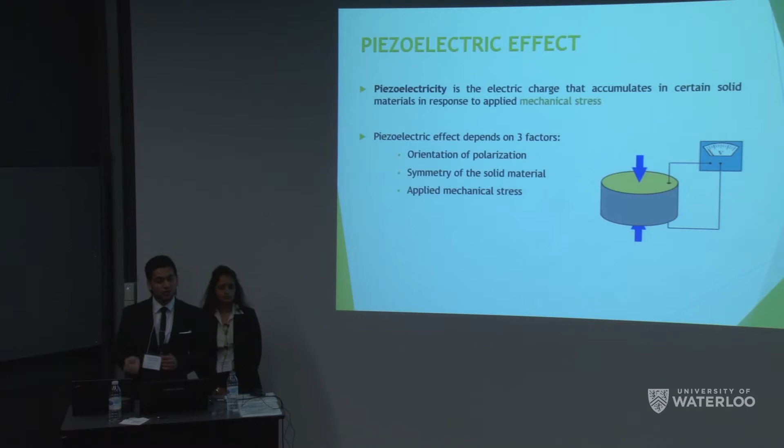Now, in order to harness this energy, we have chosen a technology well known today as piezoelectricity. Without going too much into the technical detail, piezoelectricity is simply the electric charge that accumulates in a certain solid material in response to applied mechanical stress. And for our design project, we have chosen zinc oxide. Why zinc oxide? Because it has one of the highest piezoelectric coefficients. And as engineers, we all like bigger numbers.

So where do we plan on integrating this device? Imagine if you could simply type on your keyboard and your typing would charge your laptop in real time. Imagine if you could charge your phone or iPod from the energy of your heel strikes. The possibilities are endless, and the limit is your own imagination. And now, I'll hand over to Mahika to talk about the specific details of our device and what we have been able to do so far.

Perfect. Thanks, Tad, for the great introduction. And now I would like to talk about some of the design considerations that we made and the journey so far to come up with our final device. So again, being engineers, we did start off with modeling our device. So the plots that you see here are just zinc oxide films, like bulk films.

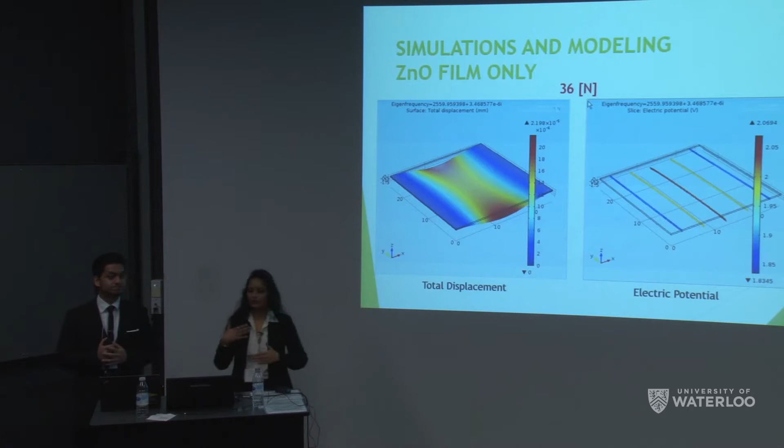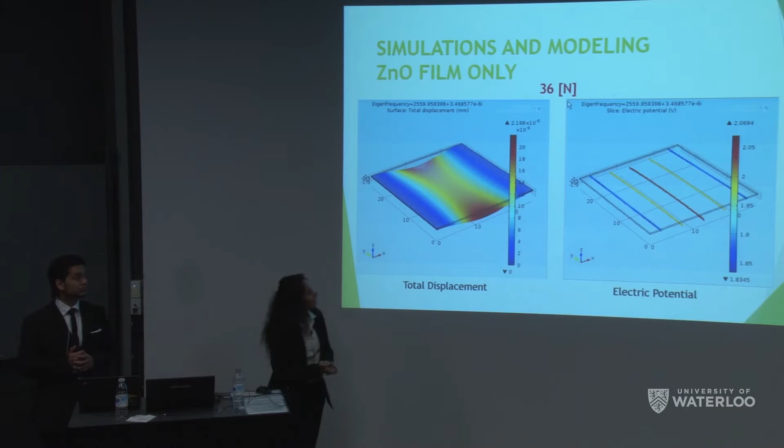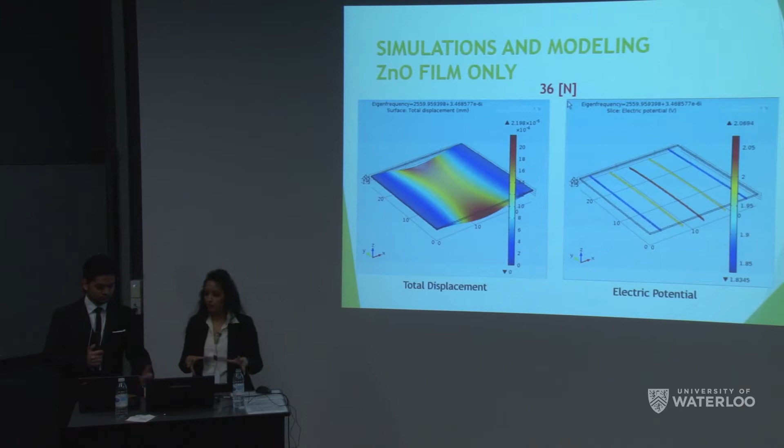And the graph on the left shows how the displacement profile would look for the zinc oxide film when it experiences a force of approximately 36 Newtons, which is what we estimated is the amount of force that an average male's heel strike generates. And then the plot on the right shows what kind of a potential it would generate on the entire zinc oxide film. So we can see from the plot that the simulation tells us that with this kind of structure, we can achieve a little over 2 volts, which is what we started off with as our benchmark.

And then moving on to nanowires, since that is what we wanted to explore more for our device, we tried to simulate how the length of nanowires could affect the resultant output that we would get due to piezoelectricity. So we simulated 2 and 4 micron lengths of nanowires, and we kept the number of wires to 10. And we observed that longer wires would give us a higher output. And again, even in literature review, we've seen people work with piezo zinc oxide nanowires and how they could tune their properties by changing the size.

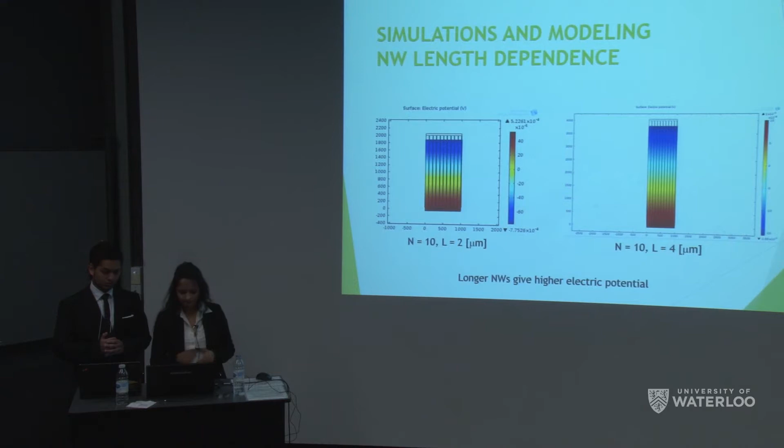So before I get into the nitty-gritty of our design considerations, I would just like to give a brief overview of what our fabrication process is. So we do start with a flexible PEN substrate, which is just a polyester, and it has great barrier properties. The next step is to deposit silicon nitride using sputtering. And the main purpose of this layer is to provide it some sturdiness so that we can get a uniform growth of our wires. But at the same time, we're not really sacrificing the flexibility of this device.

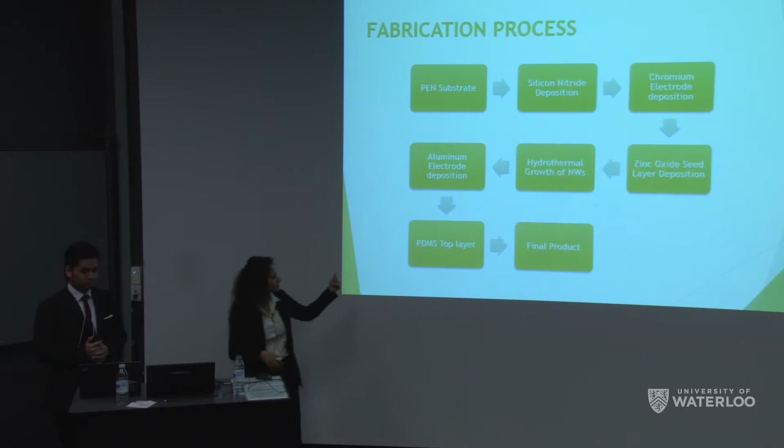The third layer is our bottom chromium electrode, on which the zinc oxide seed layer is deposited, which is key for the growth of our nanowires, for which we use the hydrothermal mechanism to grow the nanowires. And then lastly, we complete the device by using an aluminum-coated PDMS layer as the top insulation, as well as the top electrode. And that is what gives us our final device.

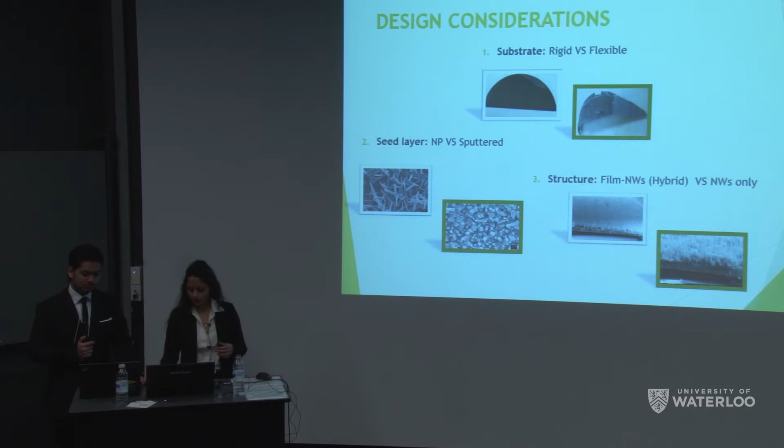So as I'd mentioned, we considered a lot of different factors to reach our final device. And the three main factors that we considered were substrate, which seed layer to use for the growth mechanism, and the final structure, the piezoelectric element of the device. So the substrate, we were debating between whether we wanted to go rigid or flexible. And so we went ahead and we tried on silicon and glass as well as PEN, and we grew some nanowires. So the images here show that in terms of the growth, we got pretty uniform and pretty similar growths on both the substrates.

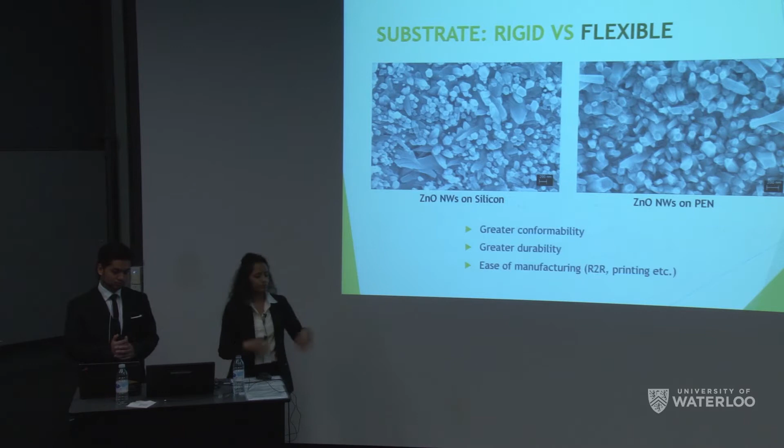And the reason why we went ahead with the flexible one is because it can conform better. It would probably be more durable than something like glass or silicon. And with new manufacturing technologies like R2R and printing coming up, we could possibly see this being easy to manufacture in the future. The next consideration was our seed layer, which is key for the growth of the nanowires because these act as nucleation sites from which the wires crystallize and grow.

So for this method, we had two approaches that we could have used. One was just spin coating some zinc oxide nanoparticles, and the other was actually RF sputtering a thin seed layer of zinc oxide. So again, we tried both to see which one would work better for our device. And as the images show here, the sputtered zinc oxide seed layer gave us much more vertical, uniform and dense growth of wires. And then even the results reflected that. We exposed both the devices to a mechanical stress by tapping on them, and we measured what electrical results we would get. And it was evident that the device made with the nanoparticle zinc oxide gave us much lower results than the sputtered seed layer.

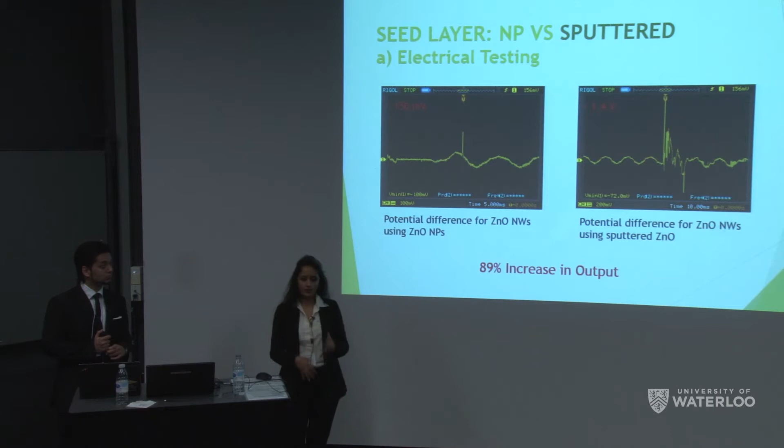And the third factor that we considered was the structure. So we wanted to see whether a hybrid device would give us more output and more durability of the device, or just nanowires. So we considered that as well. We went and we made both. But with testing and with working with the device, we observed that the zinc oxide nanowires only device gave us increased flexibility, durability, and there was almost no difference in the output that we got for both the devices.

So why nanowires only and not the bulk zinc oxide film? Well, we can think of nanowires as basically a disintegrated zinc oxide film, which we propose would provide more flexibility and durability to the device. So again, even here we saw numbers, and definitely the nanowires only device was a clear winner. So just to summarize all the design considerations, what we ended up optimizing was we used a flexible PEN substrate, we used a sputtered zinc oxide seed layer for growing the nanowires, and we used the nanowires only structure. And now I would like to move it on to Tad to talk about our characterization and testing.

Thank you, Mahika. So in order to characterize our device, as Mahika had mentioned earlier, first we've used some SEM techniques to confirm that we're actually getting some growth of nanowires. So once we confirmed that, we moved into the electrical testing, and here we will show a small demonstration of that.

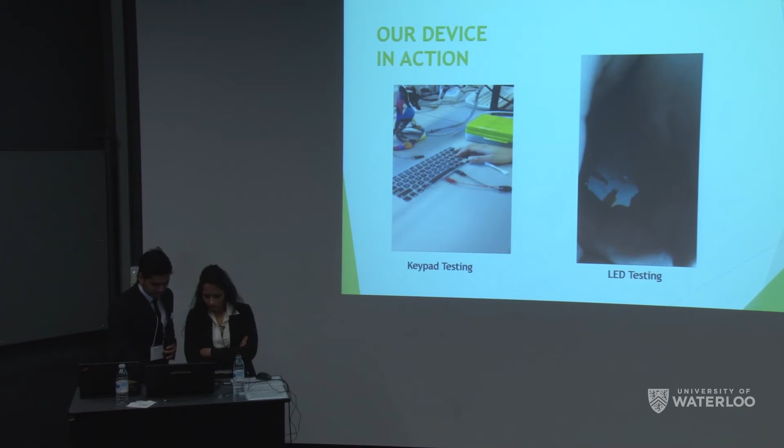One second. I think this crashed. Okay. Does it let me? It's crashed. It's taking a while to load, sorry about that, just not responding. Seriously. Yes. It's not letting us. Can you just kill the PowerPoint and try to restart? Didn't you try? You tried it yesterday. Yes, we've tested this before. Oh, yes, there we go.

So the first video is a demonstration of the keyboard that we're trying to simulate, and we have our device underneath. And upon tapping, we're expecting to see a potential difference across the oscilloscope. We don't have any sound. There was supposed to be sound here. So as you can see, there are spikes upon tapping. And next we'll be showing you a video where we've actually lit up an LED using our device.

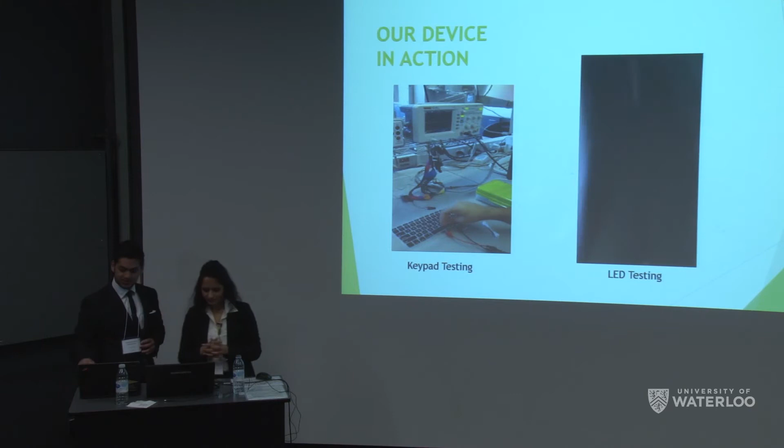It's not letting us scroll forward. Just wait.

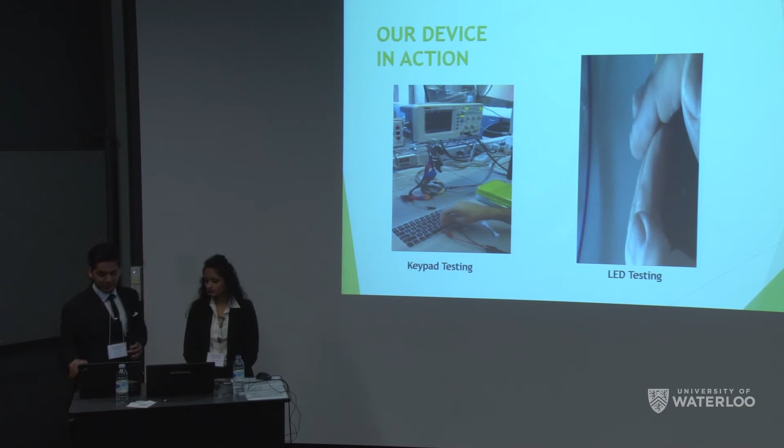So you can see the blinking happening of the LED. Yeah, there we go. You can see a blink in the LED. So as you can see, we were successfully able to light up the LED, which actually required an approximate forward voltage of around 2 volts. And this is not only proving that our device is producing a potential difference, it's also flowing current through this diode. In other words, we are creating power.

So to reinstate this, we have actually done some current measurements across a 1 ohm resistor using the circuit setup shown here. So as we tap, the current flows across the resistor, let's say clockwise, and then when we release, it flows anti-clockwise or vice versa. Channel 1 in the oscilloscope measures the potential at the top node, while channel 2 measures the potential at the bottom node, and the difference in these two potentials is the potential difference across the resistor.

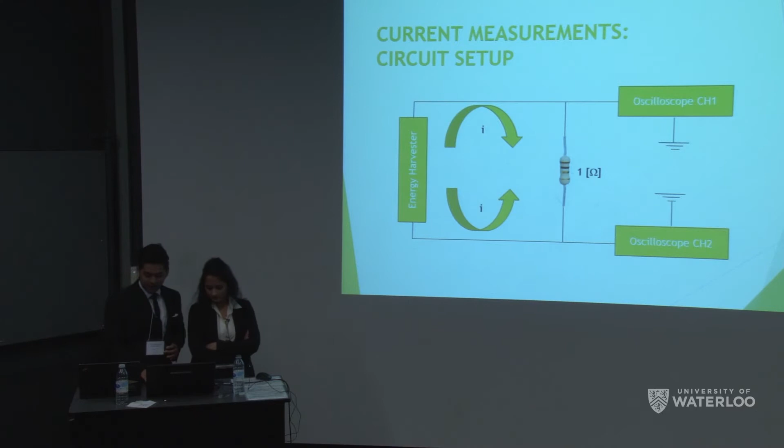And using the known value of the resistor, and using Ohm's law, of course, we can calculate the current flowing through it. And according to this setup, it was observed that our device is producing around 40 milliwatts of power, 200 milliamps of current, at an efficiency of around 5.5%, assuming that the force of each keystroke is from an average individual and not someone as strong as Professor Nasser.

So a summary of our design and results. Here's things to wrap things up. This is the big picture. On the left, we have our design considerations and the changes we have made to our design in order to achieve these higher results. On the right-hand side, we have our 3 primary goals that we initially started with and how we have successfully been able to achieve them.

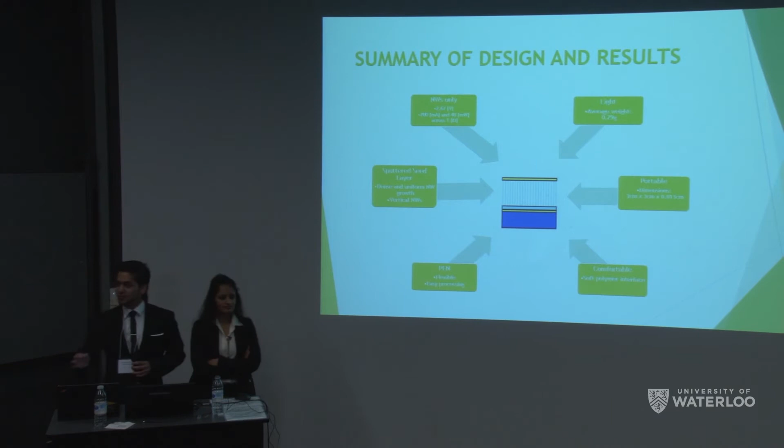So first of all, about being comfortable. It's made with soft polymer interfaces, so that makes it comfortable and can be easily integrated into wearables. It's portable, as our average device can easily fit on the surface of our palm. Good things always come in small packages. And it's light. It's approximately 0.3 grams, which is 10 times lighter than a penny. An object 10 times lighter than a penny being able to produce 40 milliwatts of power. Is this science or is this magic?

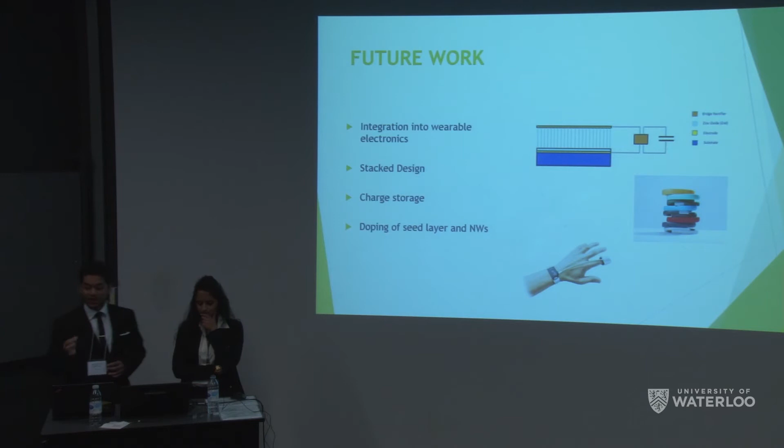But this is not where it ends. And like every other electronic device, there's always ways to improve it and take things further. And some of the few things that we would like to investigate are the following. For now, the device needs wires, but can this be integrated into e-textiles and other wearable electronics? The force that we're exerting on this device, what if we could have layers of multiple of these devices and the force could be exerted on all of them, kind of like a stack design?

We are generating current in real time, but what if we could store this and use it later? And last but not least, what if we could dope the zinc oxide nanowires to increase its conductivity and get even bigger numbers? But given the scope of our project, this is as far as we have been able to achieve. I hope you're all impressed and ready to give us some amazing remarks.

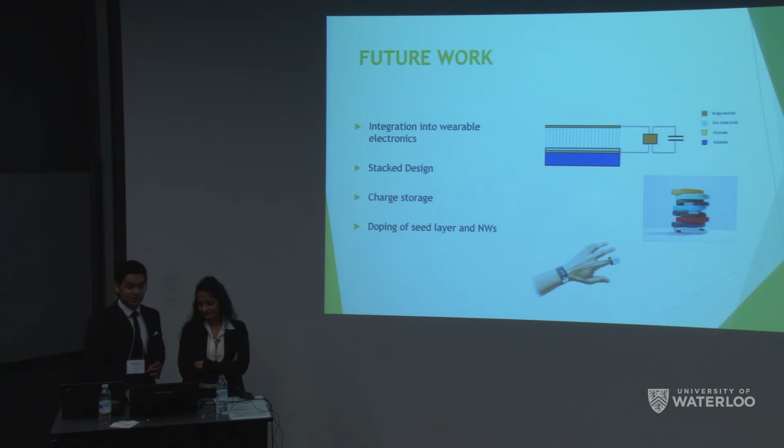Thank you for listening, and please do visit our booth. If you have any questions, please. Great. Q&A, yeah. Any questions, sir? You don't get away without.

Oh, yes, yes. Okay, so why is longer better? Well, first of all, what's your capping layer? I'm sorry? Your two electrodes are connected top and bottom. Yes. Right. Okay, and what's your capping layer then? PDMS. Okay, but at the top, what's your conductive? It's the zinc oxide nanowires. That's basically the piezoelectric element, which is basically conducting through the electrodes into the wires.

Okay, so if this is my zinc oxide coated surface, I've got a conductive base. Right. I have two electrodes on top and bottom. I connect one wire here, but if I've got zinc oxide here, your zinc oxide is not something I typically think of as being conductive. That's why we have aluminum on top. Okay, so you're putting aluminum on top, you're sputtering it. Yes, it's sputtered on the PDMS. So the aluminum coated PDMS acts for two purposes. So it's an electrode. Okay, so now you've got that coating, right. Why is longer better?

So basically, we've seen that piezoelectricity depends on the conformity of the structure of the zinc oxide crystals, right? And it's an asymmetric crystal. Now, if force is being exerted on, let's say, this much of an area, the polarization will be higher if it's longer, because the force will be exerted on more zinc oxide atoms. It's not just on one single area. So if you think of it longer, it's exerting on a higher number of atoms instead of just flat.